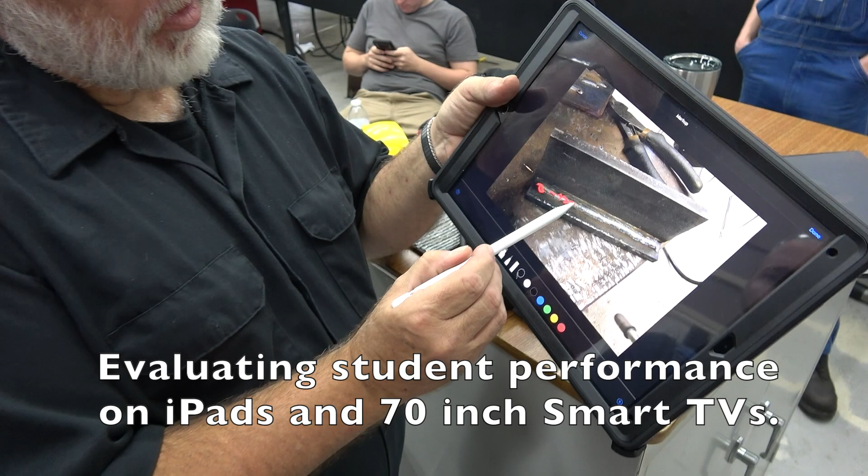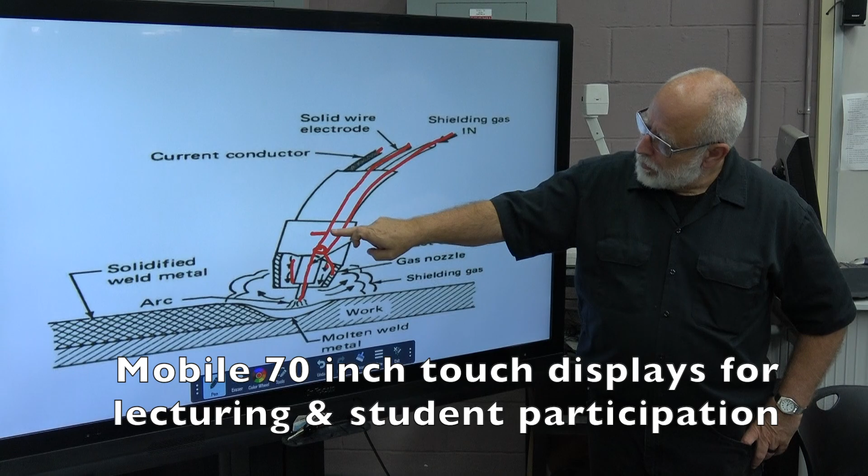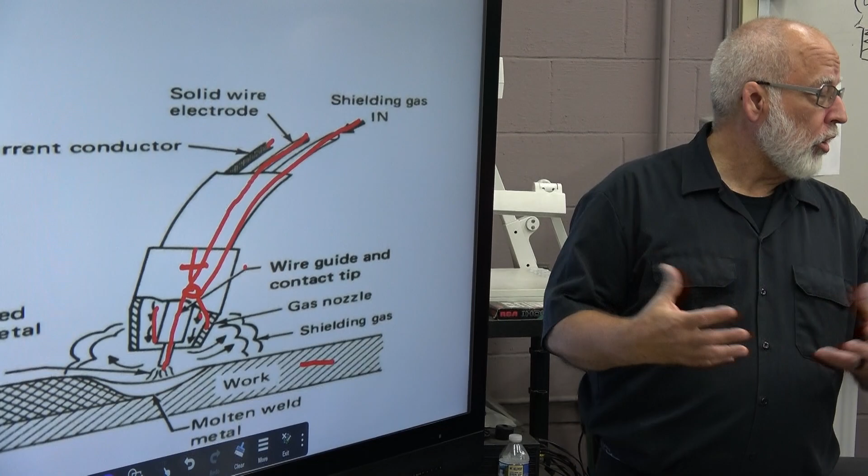And then we have the solid electrode, that's what gives us our current. It comes here and positively charges the gun. We have negatively charged the workpiece by placing the ground on it. When the wire comes in contact, the wire melts, we start the weld puddle, and we begin the welding process.

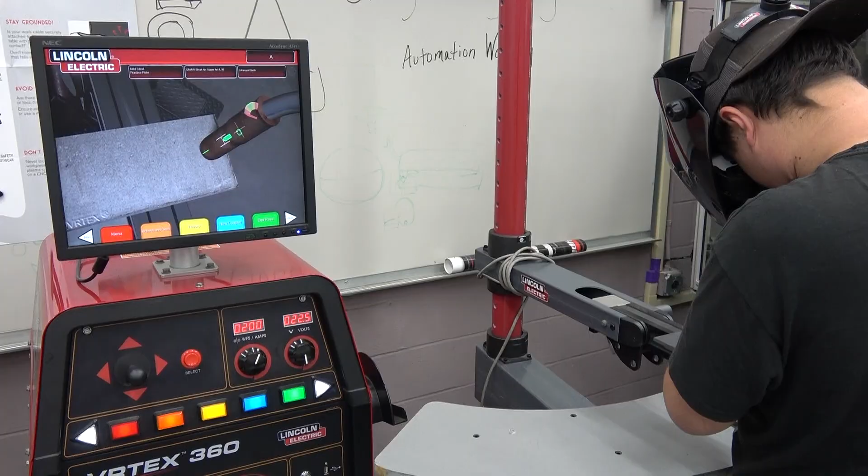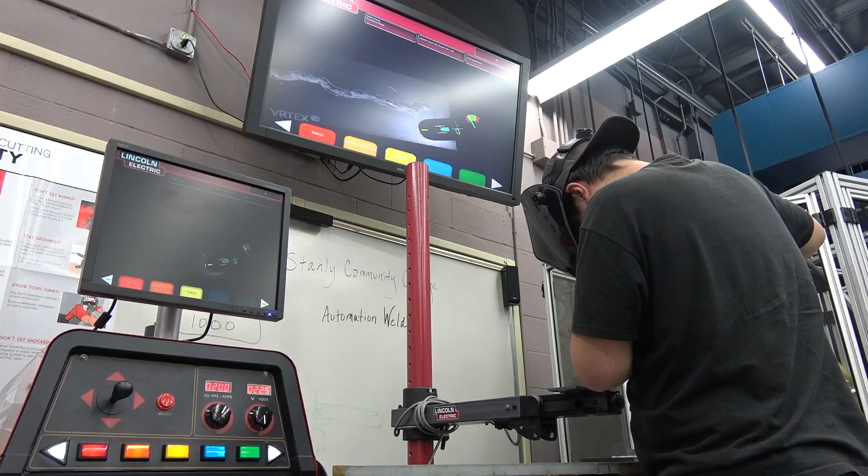And I'm the instructor for the automation welding here at Stanly Community College. We teach students how to program a real robot in real time in a safe, controlled environment.

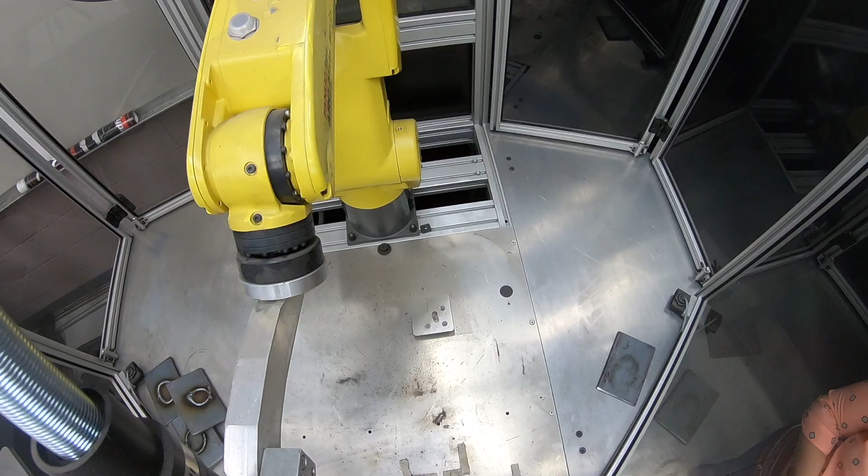This cell includes a compact robot housed in a self-contained mobile enclosure. Also attached to this robot is the PowerWave R350 welder, which you can see here below. This compact multi-process robotic power source is designed for use in robotic welding. The welder provides a fast arc response and over 65 standard welding waveforms for optimized performance.